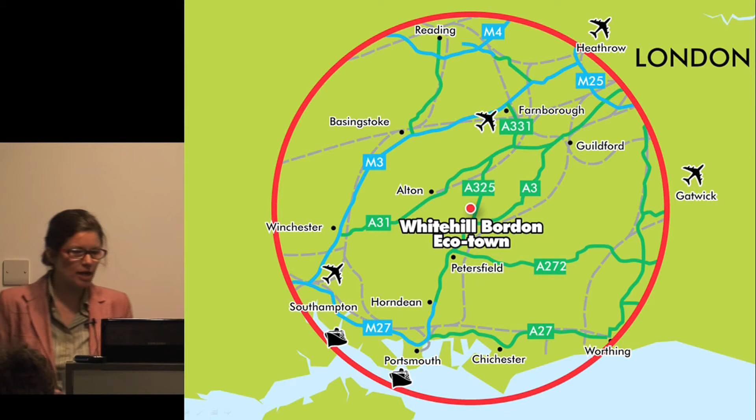Also, just to say that the competition was launched in September last year, and it ran until February when we selected the winner. Whitehill Bordon Eco-town is a town of about 16,000 people in Hampshire, not very well connected, I have to say, on public transport, but it's about 40 odd miles from London.

And the driver for the regeneration of Whitehill Bordon is the departure of the Ministry of Defence, who announced that they are going to leave in 2015, and they'll be leaving behind 250 hectares of land, which will be developable for about 4,000 homes, and also provide some positive opportunities to rebalance the town, give a town that really doesn't have a town centre a new town centre that you can see in red, a mix of homes, and also employment. About 5,500 jobs are targeted.

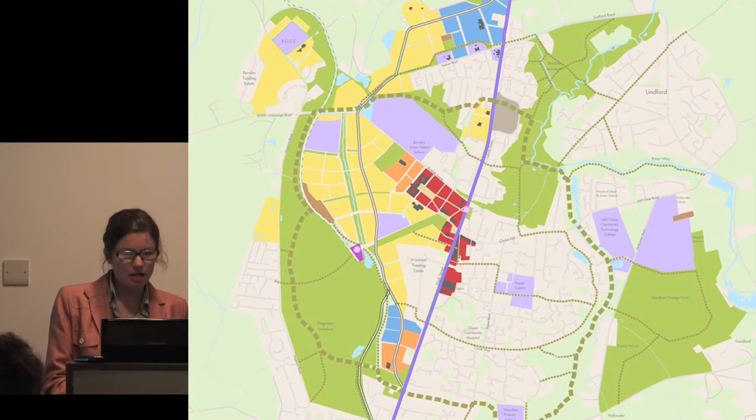But also underpinning the town is its ecological role and character, and it's surrounded by, on the south, the South Downs National Park, but also many sites of conservation importance. There are all sorts of wildlife species, amphibians, but very beautiful woodland and countryside.

And so the competition, in parallel with work that's been going on to deliver the joint core strategy, the district's vision for the whole area, there's also been the master plan for the town to try and have a whole town approach rather than just looking at piecemeal development. So it was very important in parallel that we try to deliver some small-scale projects, and we had the opportunity with some Eco-town funding from about 2008 or 9 to deliver some small-scale projects.

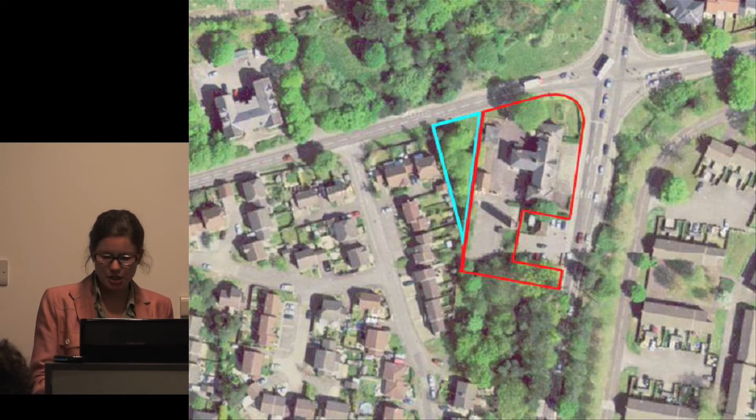And this is the site for the competition, quite a challenging site. And on this site there are going to be 3 projects. The first, which is a former Ministry of Defence fire station, an Edwardian building, number 1 there, which is on site at the moment, and we're putting in thermal improvements to improve the performance of the building and reducing energy loss.

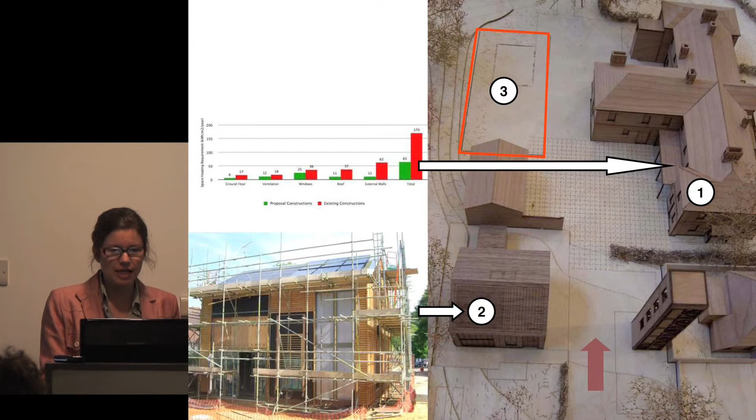The second project, which is a very exciting one, is an exhibition house designed by Richards Michael, that will be testing different technologies, but also testing different passive design approaches to reducing heat loss, but also benefiting from solar gain. So things like a trombe wall and winter garden, and also in the garden we have an interseasonal heat store. And just to the north of the site, that is the competition site there for 3 eco-terraces.

So the main aims of the competition, really, it was an OJEU process, and we've worked in partnership, East Hampshire District Council, with Radian Housing Group, who will be the commissioning client. And what was very important was actually overcoming challenges that are particularly prevalent at the moment, I think, in the public sector, particularly with the lack of money, and that is risk.

The risk of running an OJEU competition and sort of ticking all the safety boxes. And it was important, and I felt part of my role was to make sure that we secured quality and secured some of our ambitions in the selection of the right team. It wasn't about selecting a particular scheme, but finding the right team to help deliver our ambitions.

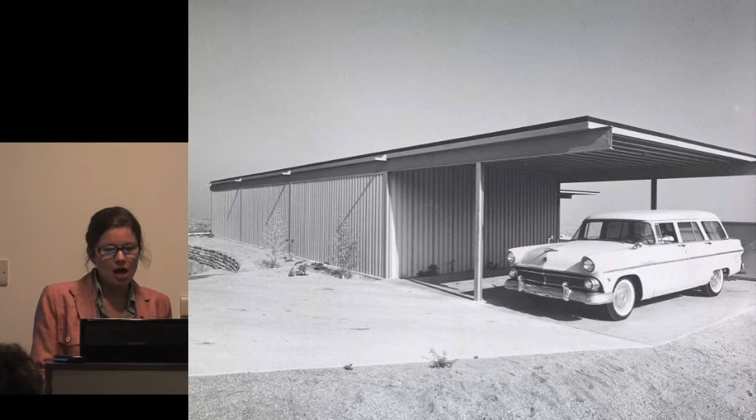So we were very ambitious. We were quite inspired by the Weissenhof Siedlung in Stuttgart. We wanted to be able to deliver affordable homes, but affordable homes that challenge what affordable housing might be like. We were also inspired by case study houses in California, and wanted to be able to bring some innovation and opportunities to look at mass production, possibly. So not just a solution for the site, but also a model for homes across the town.

So not too inspiring. Also to the west of the site are lots of trees, so providing solar shading, which isn't necessarily what you want. And the site itself was east-west orientated, so again, not providing obvious opportunities for solar benefits.

Another constraint or a challenge that we had to overcome was that recent development in the town, there hasn't been a lot, but what there has been is poor, firmly fitting itself in all the aspects of poor design, which I don't need to go into a lot. But what that did mean was that residents are very suspicious about anything new and about what change might bring. And this poor design, it's not just in the last 10 or 15 years, but actually over about 50 years, where piecemeal, inward-looking development has really had a negative impact on the town.

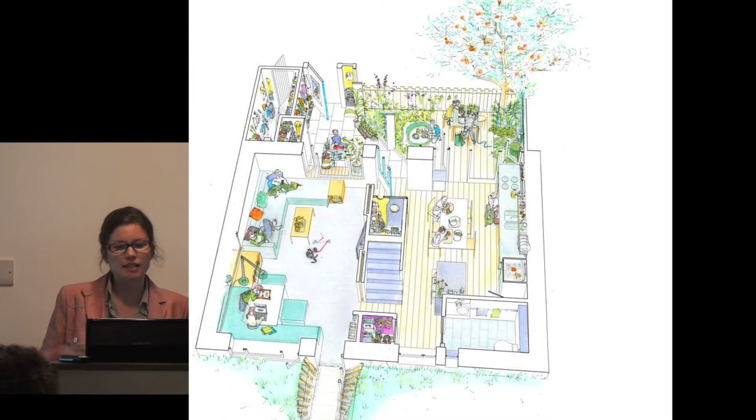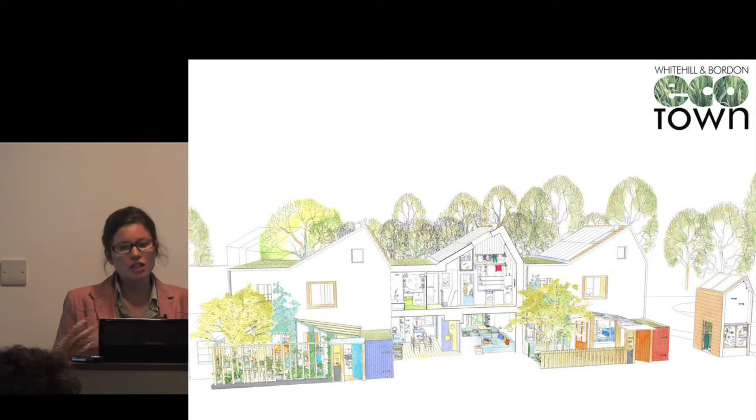I think it is important to say that what I think they demonstrated was not only listening to residents, really looking at the brief and really understanding it, but also the importance of providing that balance between somewhere that is livable and will be a pleasant home to somewhere that does try to respond to the demands of what sustainable design could be about. Thank you very much.

Thank you, Sarah. I thought it would be quite helpful, really, to have a kind of canter through all of the submissions, because we were really grateful for the effort that people put in at the competition stage and the quality of the schemes that were submitted. So I'm going to talk about the lessons really in a thematic way, but trying to use some of the submitted drawings to illustrate some of the points.

But there's two important things about the competition brief that I think are worth mentioning. Firstly, we set very ambitious targets, but we were very mindful of the dilemma of, in a way, prescribing a solution by aiming for a certain energy target. And we really didn't want to have houses whose organisation and use was solely determined by energy requirements. But at the same time, we also wanted to make sure that the claims that were being made about energy and sustainability were actually backed up with some evidence.

So instead of just setting targets, we asked the competitors to also do modelling work and to provide some verification of issues to do with CO2 emissions, heat loss, and overheating as well. And we set a minimum target of Code Level 4 in energy terms, because we also didn't want to rule out other very valid approaches to low energy design, such as Passivhaus, which has a slightly different emphasis.

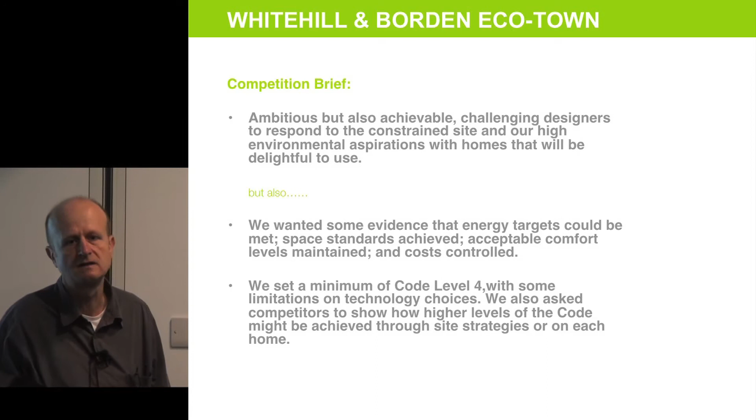It has an emphasis on demand reduction and on comfort, and is less driven by CO2 emissions reduction. And we wanted to keep that kind of discussion within the competition environment. As Sarah has said, it is a very constrained site, and it makes it very difficult, even just accommodating the accommodation brief within the size of the site.

But one of the constraints is there's very little opportunity for private outdoor space, for creating a bit of the outdoor realm, or a transition between the outdoor and the indoor that belongs to the dwelling. And the challenge of the large trees on the western side was also one that provoked different responses. So different competitors had a different attitude to whether that should be appropriated and brought within the schemes, whether it should be modified so that we could improve solar access.

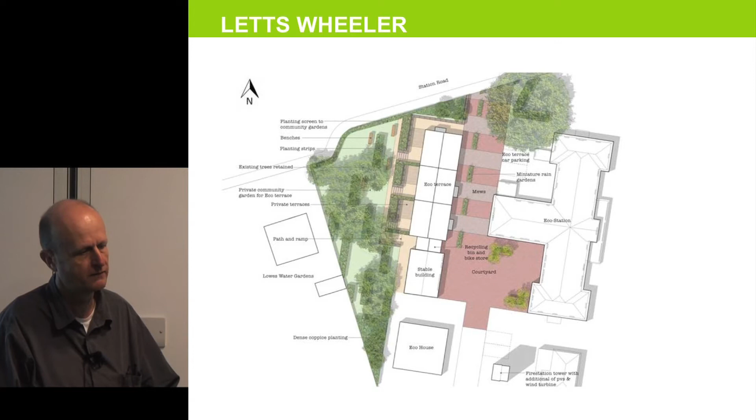And Letts Wheeler had, in a way, a very simple strategy of making a terrace in a conventional form and trying to suggest some areas to the front and the back of the house that might be for more private use. When I looked at the site, I really struggled to see that you could get 3 houses on it at all. It is very, very constrained. And in a way, that's a good thing for a prototype scheme, because you're setting a difficult task from the outset.

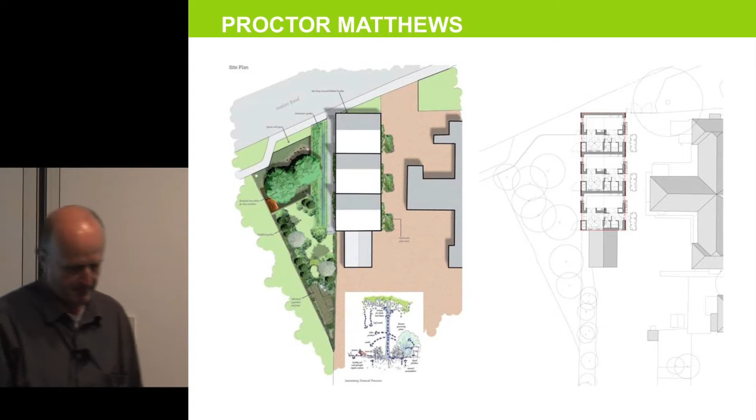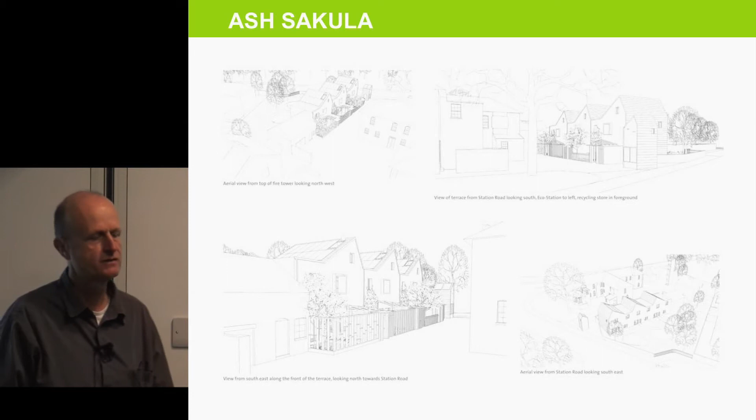What was also interesting is that the constrained nature of the site generated two responses in terms of building form. And to my mind, these weren't only architectural responses, they were also partly philosophical ones. So the two schemes that took a passive house approach created very simple terraces. So the houses have a very simple external envelope driven by good practice in building physics, not wanting to have lots of complicated geometries that create heat loss.

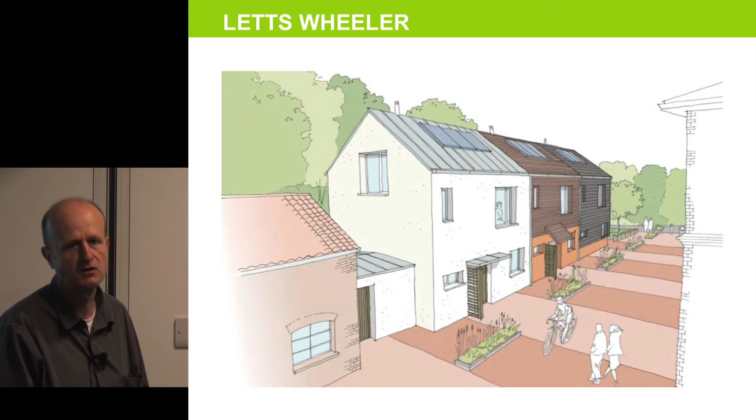And the three schemes that followed, in a way, more a code approach, I would say, deliberately took the view that they would present as much roof as possible to south and maximise solar access. And so we had three schemes where houses were effectively turned to present a gable to the street rather than presenting a continuous frontage. And within those, there were different versions of how you would actually then create frontage from effectively the side of a house.

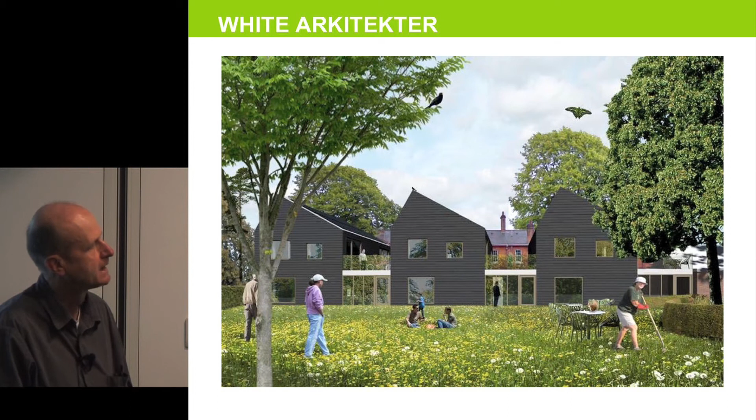And White Arkitekter incorporated a European idea of making a courtyard that's also a space that can be used for the car, and in a way proposed a model that was less familiar to the lay members of the jury. This idea that a carport space can also be a useful habitable space. And in doing so, also created some problems for themselves in making a very constrained plot to actually build on.

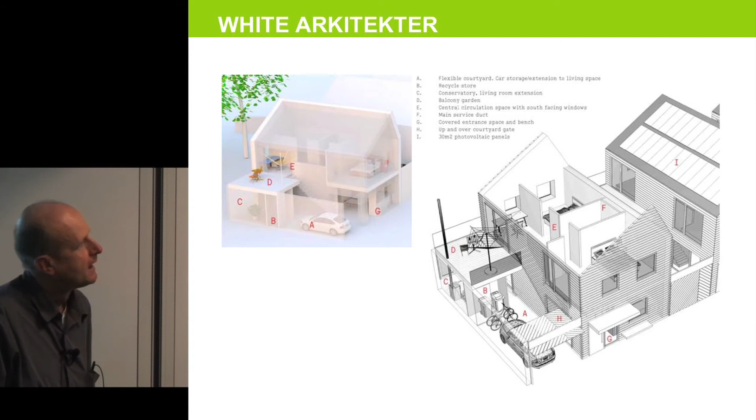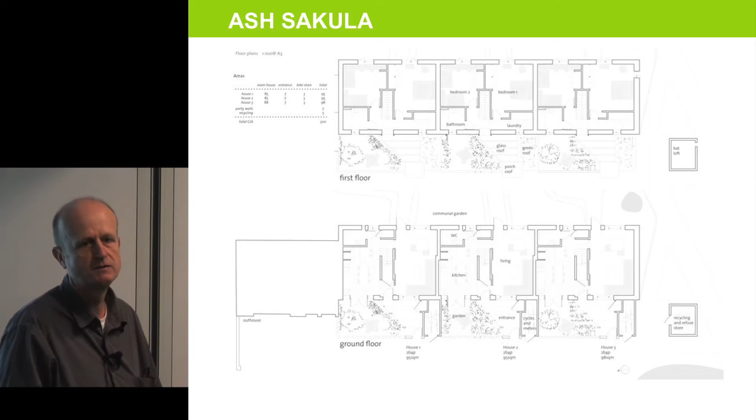Ash Sakula's scheme was also very interesting in that it proposed a very loose form of the house plan. So something that was very open and very flexible. They only proposed two-bedroom houses, which in 95 square metres is quite generous. But it was part of an idea of a loose fit. So instead of prescribing the way that the house is used, there were clues to how it would be interpreted. But it was loose enough and open enough for different interpretations of living to be accommodated.

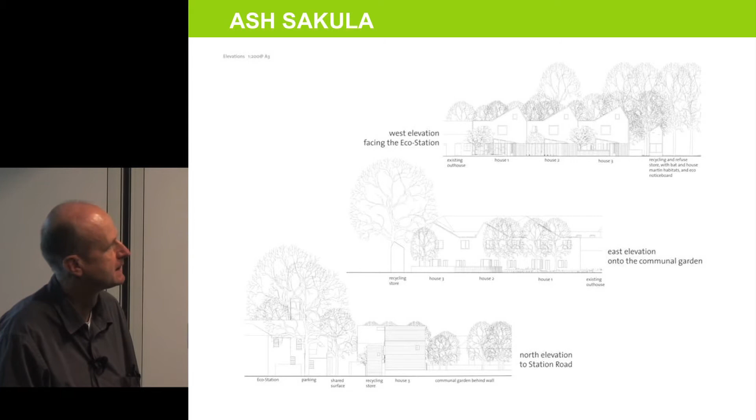And that was a different approach really from some that were quite prescriptive in the way that they imagined the house would be occupied. I'll come on to some of those a bit later. One of the things we were also looking for, obviously, was the idea of a model that could be replicated in volume or replicated in a way that it could start to make urban space.

And it was very interesting to see this drawing from Justin Bere's passive house proposal, which was suggesting that actually the same house in different orientations would perform pretty much similarly in terms of reducing heating load, so all within the passive house standard of 15 kilowatt hours per square metre. And that kind of prompted some interesting discussions and thoughts as well, because actually one associates passive house with a solution that's very orientation driven.

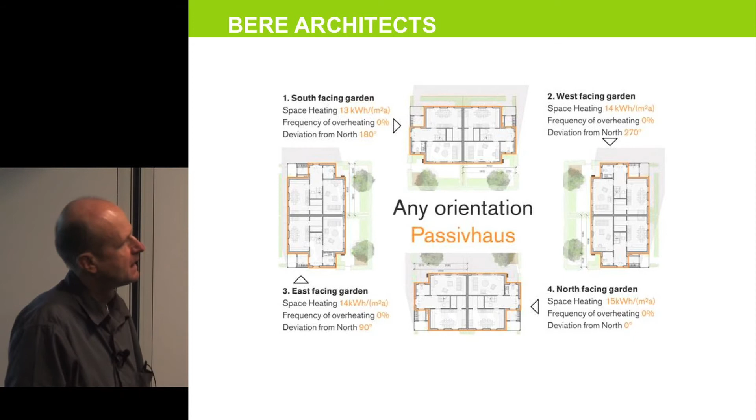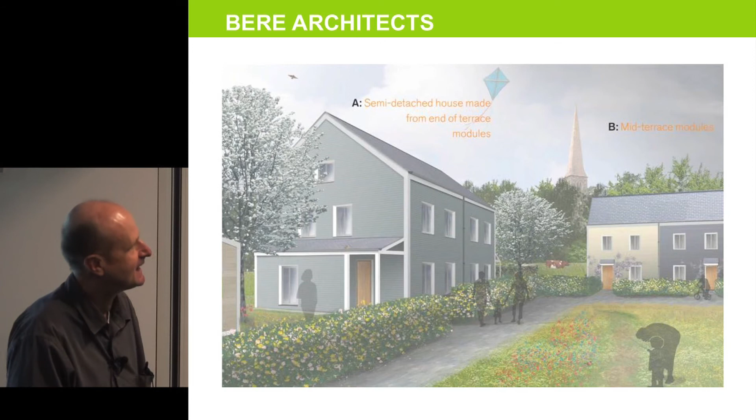We also were interested in a way. This is the extreme opposite in terms of planning from the winning scheme, in that it is quite a traditionally subdivided space on the ground floor. And we felt that on an east-west orientated site, that was a bit of a missed opportunity, not being able to have a living space that benefited from evening and morning light. And in a way, it's a contrast to the openness of Robert's team's scheme.

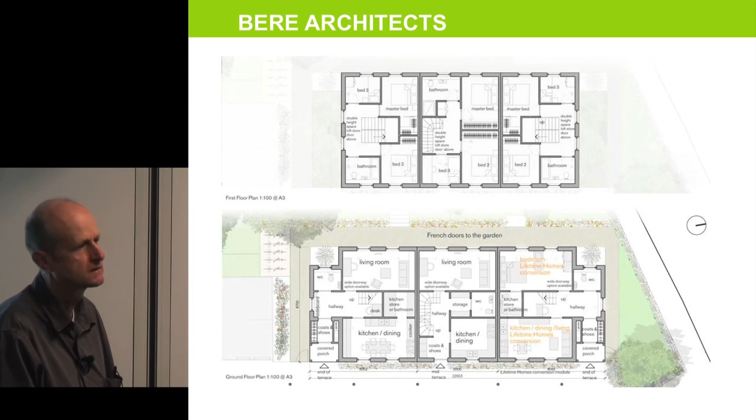It also tried to propose 3 bedrooms, but there seemed to be a disproportionate use of accommodation, so a large volume over the stair and a relatively small third bedroom. And it really served as an interesting contrast in a way, and one of the two extremes in the proposals. Lots of work was done on this scheme, however, on costing, which was appreciated. In fact, lots of the discussion in the interview was about how rigorously that team had dealt with that.

Proctor Matthews has some very nice ideas about how a courtyard house could be evolved into a kind of urban proposition. So it could be combined in courtyards that also produced productive landscape space, and a house that could turn corners and make very, very enticing external space.

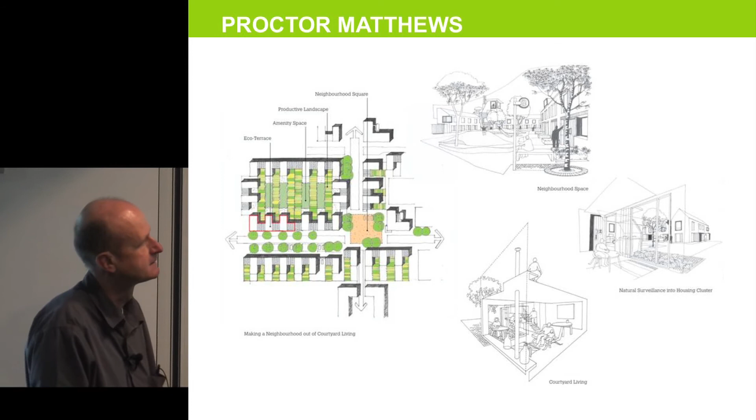They also had some interesting ideas about the internal organisation, but again, this had a mixed reception in the judging process. One of the ideas was that the stair, which is here and turns delightfully around that corner that looks out to the western space, was something that could be used in a variety of ways. So it enclosed the study space, the stair wall could be used for a library.

And it was interesting how a lay audience found it very difficult to understand how you would inhabit a house like that. But they also picked up on some quite practical things about whether the courtyard space on our constrained site would actually get enough daylight. So it was an interesting dilemma in this scheme of wanting to make private enclosed space and make an inventive plan and try and do that on a very, very small site. And of course, with very high energy standards, also with extremely thick external walls. So lots of difficult things being balanced together.

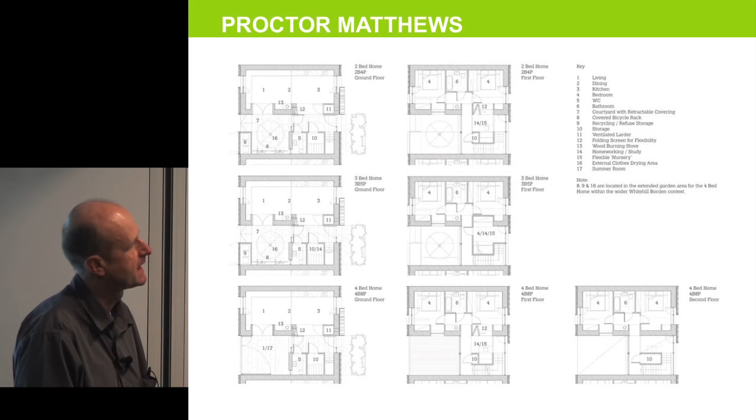We were looking for some innovation, but from housing association experience, we'd set some rules in the brief about technologies that we didn't want to see used because we had some very bad experience with them. And so the innovations that we warmed to were ones that really proposed suggestions for ways of living, or prompts for a more sustainable lifestyle, or feedback or measurement that gave the users of the house more information about how they were using it, what the technology was doing, and also ideas that made the technology more manageable and more serviceable. And when we get on to energy, you'll see that all of the proposals suggested a lot of technology was needed to get to the standards we were expecting.

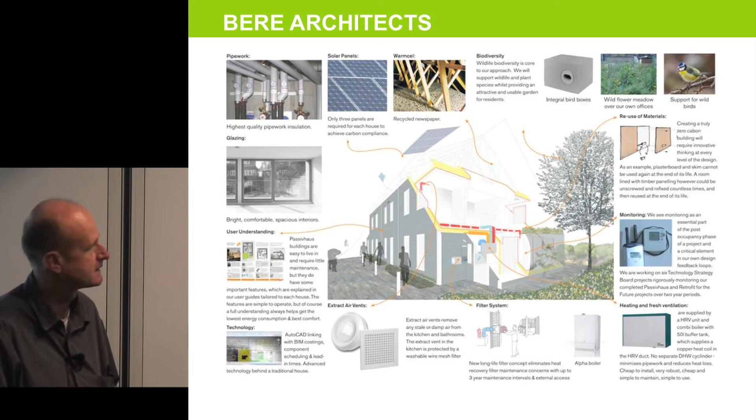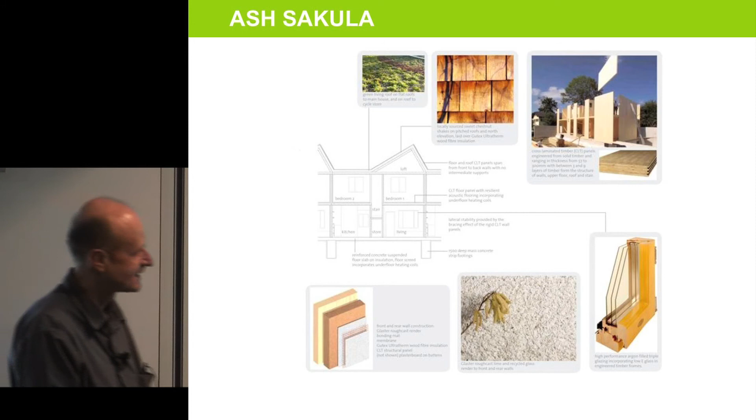In the winning scheme, there were some very clear and nicely illustrated ideas about materials, and a desire to use materials that were inherently benign. So wood fibre insulation, timber products with low emissions. But there are some interesting paradoxes when, for instance, you choose a chestnut cladding that's locally sourced, relatively low volume material used sparingly around the outside of the house. But the main volume of material, cross-laminated timber, probably comes from Poland, unless Robert can use his considerable charm and influence to persuade someone to start making it over here. There were innovations in the planning as well, and interestingly, these also were harder for the lay audience to digest.

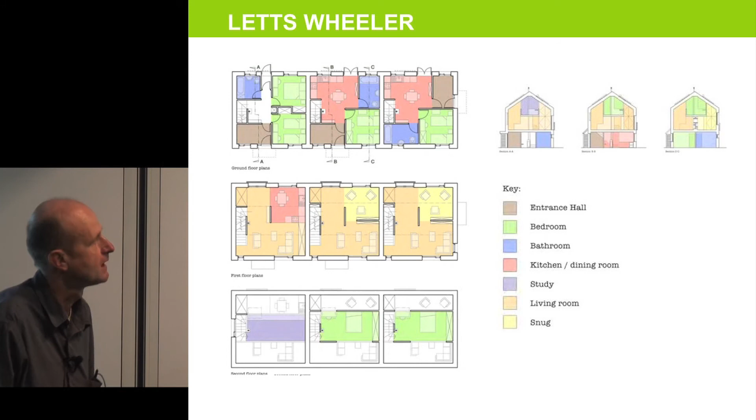And there are more prosaic issues to do with Lifetime Homes compliance. You need to have useful reception space on the ground floor, some kind of family gathering space, for Lifetime Homes accreditation. And that's a cutaway section of their scheme. Again, another one that illustrates actually what was going on in terms of technology, and also the very ambitious U values that people were proposing.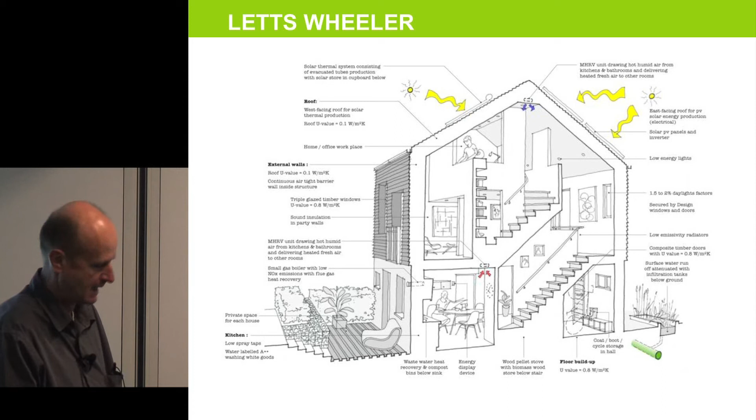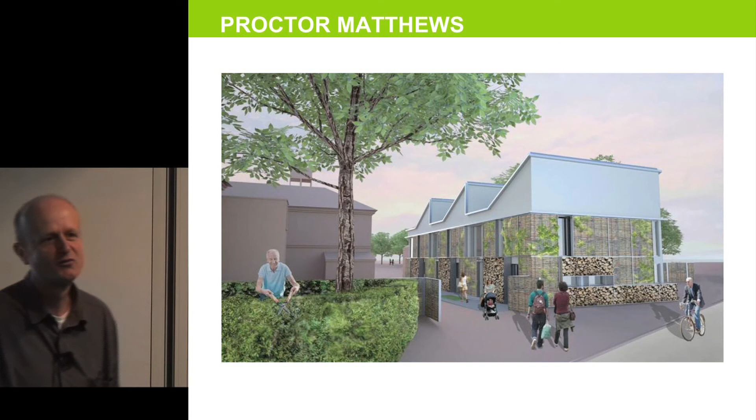And a little bit more on innovation, because this one also really stumped us. The idea that you have a rain screen of a material that perhaps has some craft element in it. So here the suggestion is that the cladding is a willow or a chestnut hurdle, and that supports biodiversity. It's got wisteria climbing up it, and it's got birds and insects nesting in it. That's either a really beguiling romantic idea, or for a housing manager it's his worst nightmare. And so that split the jury really.

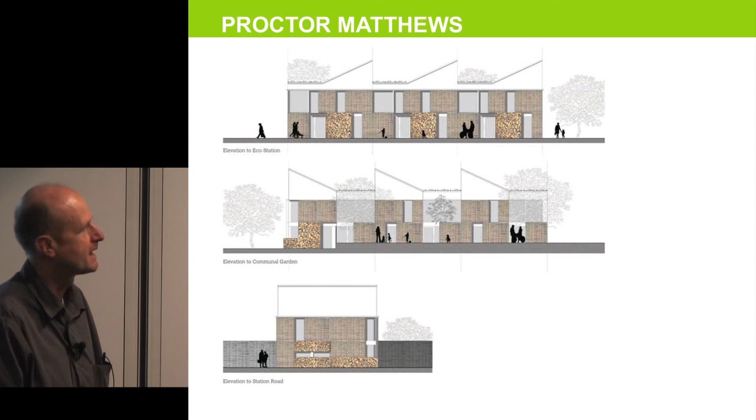And interestingly, a characteristic of Proctor Matthews' submission was that it was just so rich with ideas. There were so many things. It was actually quite difficult to drill down into the really important ones. And we got sidetracked on several proposals on things that perhaps the teams weren't that precious about, but we'd latched onto. And that particularly happened in the energy submission.

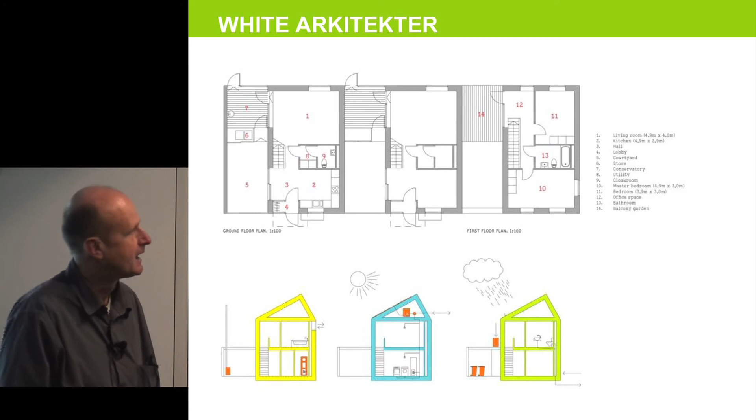So White Arkitekter came with a slightly different approach, saying, what about making an all-electric house? We'll take full advantage of incentives like the feed-in tariff now. We can demonstrate that if you have a large enough south-facing roof, you can be a net exporter of electricity. So this house will also generate an income for you, as well as being a sustainable place to live. And they did some very interesting analysis.

But this proposal was very much predicated on the idea of using a heat pump, and we'd said we didn't want to see heat pumps. We'd had bad experiences with them. Field trials are showing that it's very variable performance. But White Arkitekter battled on, and unfortunately the heat pump they were proposing was the very one that Radiant Housing Association had been taking out from retrofit projects. So that was a big shotgun aimed at the foot, unfortunately, for this scheme.

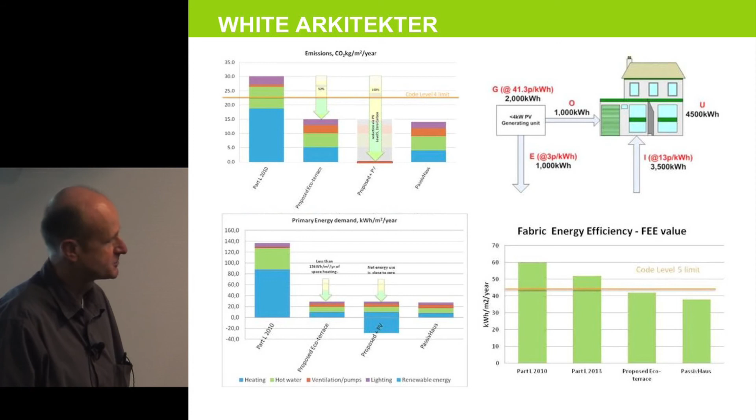Bere Architects really clearly demonstrated their experience in using Passive House and in realistic energy targets. So interestingly, the practice with the most background in building low energy designs was actually aiming at the most manageable U values, with a fairly conventional timber frame construction. So an engineered timber stud, with insulation on the inside for a service zone to prevent a thermal bridge.

And they were the only one to actually start modelling thermal bridging, because of course once you insulate these houses really well, most of the heat loss is through other mechanisms. It's through thermal bridging and infiltration losses. It's not through the walls. There's a certain point where pursuing wall U values is actually pretty futile if you haven't thought about the other things as well.

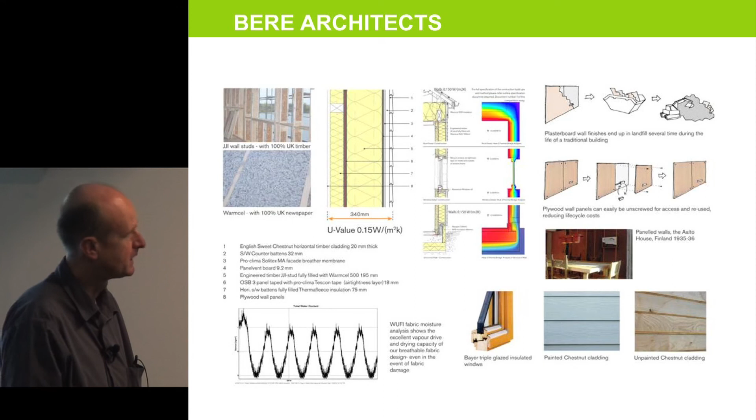Proctor Matthews, again, a beautiful illustration, but the clarity of the drawing belies a certain complexity in the environmental solutions, and this was characteristic of everybody's submission. One of the reasons we set the target at Code 4 is we were hoping somebody would come along and say, well, what about a naturally ventilated house? What about a robust house that we all know works fairly well? We won't pursue endless energy targets, and we'll make it really durable and easy to live in.

But I think it's one of the sort of characteristics of competitions. There's a tendency to want to put everything in because you want to show the jurors that you've got it covered. And if you've got some bloke on the panel who's obsessed about solar thermal energy, then you know he's going to tick your box.

But my experience trying to do houses like this, where there are up to 3 ways of heating hot water. So you've got a solar thermal panel, you've got something from an efficient condensing boiler, you've got an immersion heater inside. It's very difficult for the house to know how to heat that water. It needs a control system, and it's even harder for the occupier to know how you set that control system to work in an optimal way.

And we're certainly finding that housing associations are running a bit scared of solar thermal at the moment because of issues to do with Legionnaires. Obviously you can counter those by pasteurising the whole system, but that bungs loads of energy into the hot water system every fortnight and kind of counters some of the CO2 ambitions. To my mind, PV and solar thermal, they're about equivalent in CO2 terms, so why not just have one simple system? Why not have a system that doesn't introduce complications?

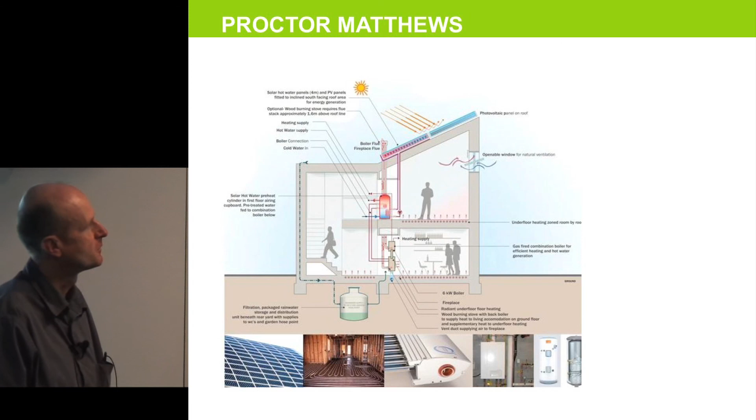And in a way, the final sketch about the winning scheme's submission has a kind of uncertainty to it and a kind of recognition that actually just by designing these things perfectly, it doesn't necessarily mean they're going to work like that. In principle, it has all the same elements. So I think, sorry, I'm struggling to find the pointer. I think we ought to look at whether these things can be simplified.

But one thing that was very interesting was a proposal to take tempered air via a ground network and feed it into the MVHR unit. So there's a beginning to think about, one of the aims of the brief was to sort of anticipate issues to do with summer overheating. That will probably have an impact on the efficiency of the fan in the MVHR unit, but it will be very interesting to see whether it makes a useful contribution in the summer condition.

It's a difficult thing, again, needs some technical thought because you get condensation in this ground labyrinth, and you've got to know how you're dealing with the quality of the fresh air coming into the house. We've also had rats and rabbits loving this kind of underground environment when we've tried it.

But I'll leave this slide up for a little bit because it is fascinating, the standardization in the way that these things are approached. Nobody proposed a cavity wall. Everybody proposed some form of prefabrication. Everybody proposed a mechanical ventilation system with heat recovery. Everybody proposed that we used, apart from the passive house schemes that said actually we can get to passive house without any of these renewables, and if you really want to bung them on to meet UK policy, then we can do that on an east-west roof.

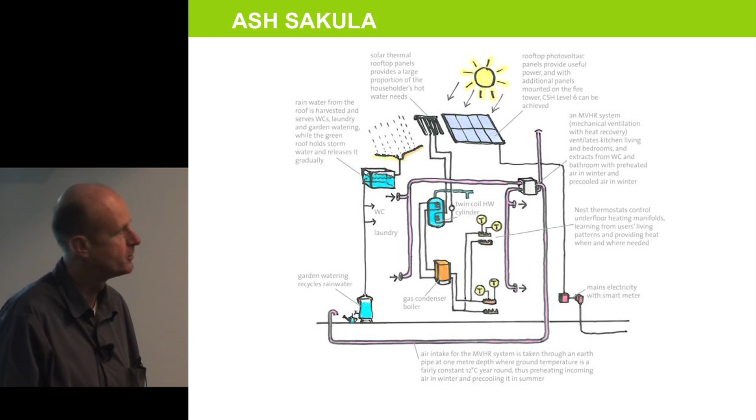And in a way we really warmed to this project most, going back to the kind of sustaining a vision about how it would be used. Every technology idea was kind of backed up with some thoughts about what it meant for the way that the house was used and what it meant for people trying to understand how it's going to be operated and what it meant for a housing association trying to run it. And I think there was an acknowledgement that these things are complicated.

The next stage is trying to get a way of understanding how they're running and getting some engagement between the occupiers and the technology. It's one of the paradoxes of the whole code process in the last few years that the most sophisticated houses have been forced upon what you could say is the least enthusiastic audience for them. So we're getting very complicated houses being used in affordable housing. One well-known housing association director has a phrase, we're building Code 6 houses for Code 1 occupiers. And it's that sort of mismatch.

I know this seems to be slightly disparaging, but the point is that actually people who are used to using something very intuitively without any instruction at all expect the house to work on its own. And so the final scheme, again, a lovely drawing, recognising that you do hang clothes up to dry, you need a good space to hang them, you do put stuff outside in front, that actually the house is a thing that is appropriated and occupied. It's not a mechanism that is enforced on people.

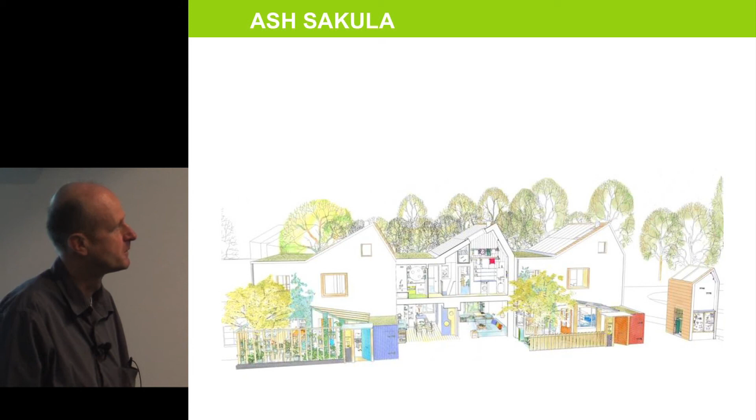So, fair summary, Robin, I must have left things out. Brilliant, thank you very much.